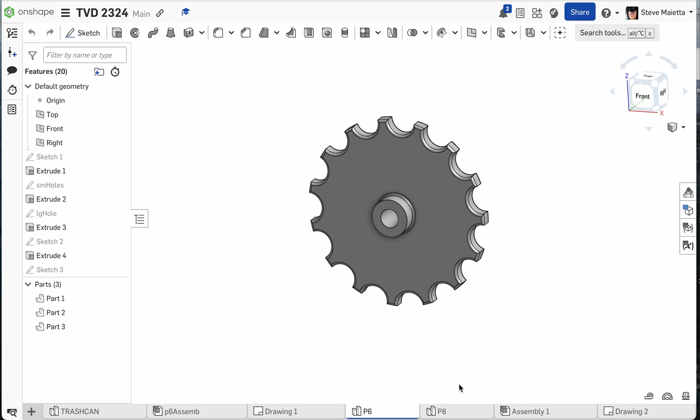Hello, class. Let's build an assembly of parts in Onshape. Go to plus, create assembly. Now we're going to insert our three parts into our empty workspace.

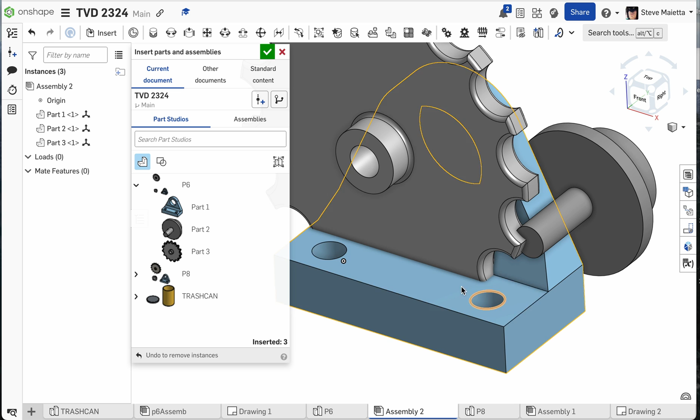Insert, find your parts, click part 1, drop it. Click part 2, drop it. Click part 3, drop it. If you have 4 parts, put your 4th part in. Accept that. Now, you see we have 3 parts. Let's move them around to get a little space. You can click and drag, okay?

Something to note, when you're moving things in an assembly, use the standard views. It makes lining things up easier. Okay, there's our 3 parts. One thing I recommend is line up the base part, the foundation of your project. For us, it's this bracket. I would kind of make sure it's near the origin somewhere. It's not super important, but it can't hurt.

Okay, now let's take our base part number 1, and we're going to 2-finger click here and we're going to fix it. That locks it to the ground so it can't move anymore, and that's important to have a piece that can't move, especially since we want our gear to be able to spin when we animate it.

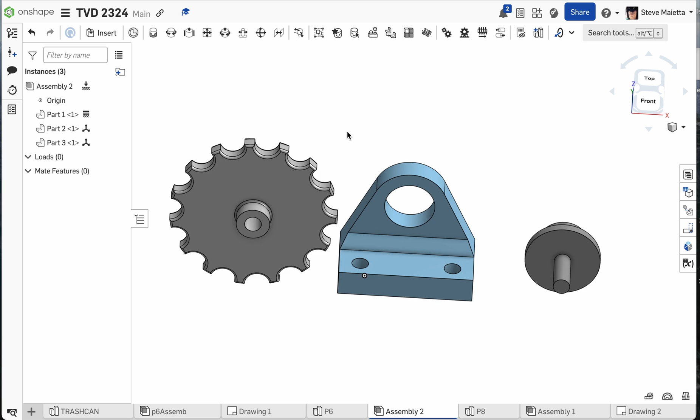Okay, now we're going to put our axle into our base, and looking at our axle, I noticed that it's in the wrong orientation. It should be pointing back this way. So I'm going to go top view and click on it, and now you see you have some arrows to move and some handles here, this one to rotate. So I'm going to click that handle and drag it, and I'm going to go to 180. Make sure you type in 180.

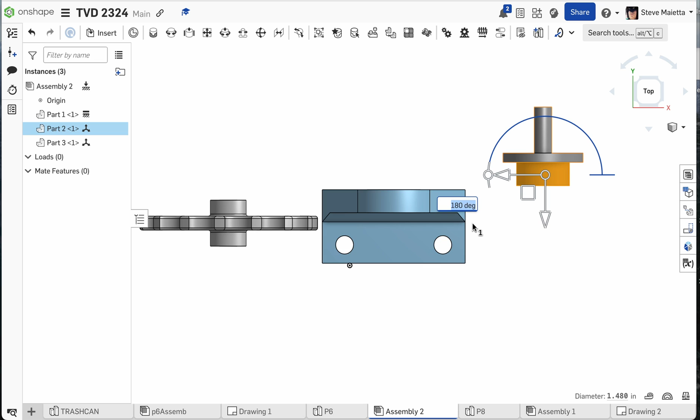Always rotate your parts with 90-degree increments, okay? Or else they get all out of whack and it's hard to assemble things. Okay, 180. Click, and now it's set up right. Great. Now we're going to fasten it to our thing. You cannot just drag it here and call it good, okay? You need to use what are known as mates.

The first mate is here. It's called a fasten mate. We're going to fasten our axle to our base. So I'm going to select what surface I want to match with another surface. For me, that's going to be this back surface of our axle. And notice when you hover, you see these little yellow circles. Those are known as mate connectors. Onshape puts them at all corners and edges and centers of cylinders.

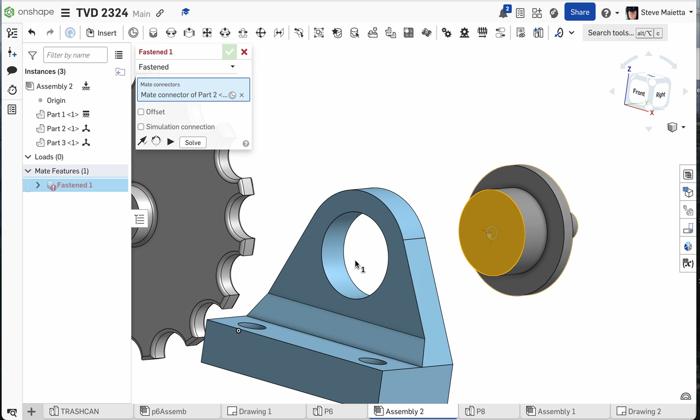So I'm going to select this one there, click it. That puts it in our list. And I'm going to select the one that lives at the surface of this cylinder right here. Click it. And now I'm going to accept that. And now our axle is perfectly fastened into our bracket.

Note, if you need to go back into your mate, you can double click it over here and you can edit. Maybe you need to flip your part around like that. You can flip the axis. You can move mate connectors away from each other using offset. So if I needed to move this part, I could shift it over a bit. Or in this way, I could shift it over a lot or a little. So the offset is very handy.

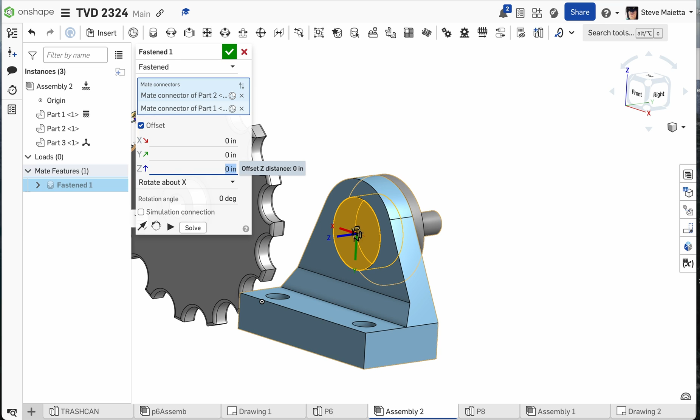And you can also rotate parts. You can rotate those mate connectors as well. We're not going to do any of that, but there's that option. All right, so that's fastened to that. Great. The next part is the sprocket, and we need to make the sprocket live on the axle here, and it needs to be able to spin.

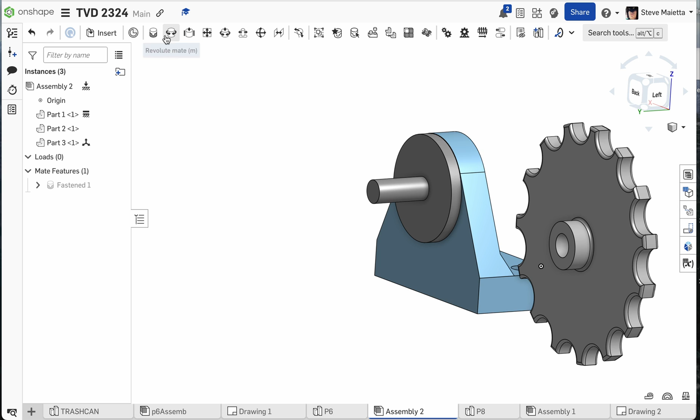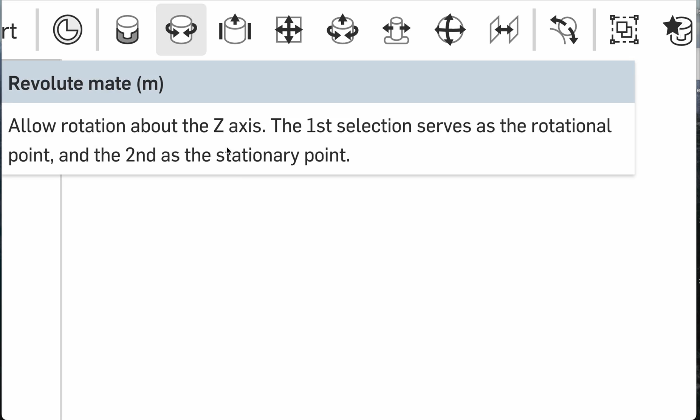So the next mate is called revolute, and if you look at the shape of that, it looks like something that can spin. And what does it say? It says allows rotation about the z-axis. The first selection serves as the rotational point, and the second as the stationary. So we're going to select first our sprocket and secondly our axle. Same way, you need to select 2 mate connectors. I'm going to click the revolute mate.

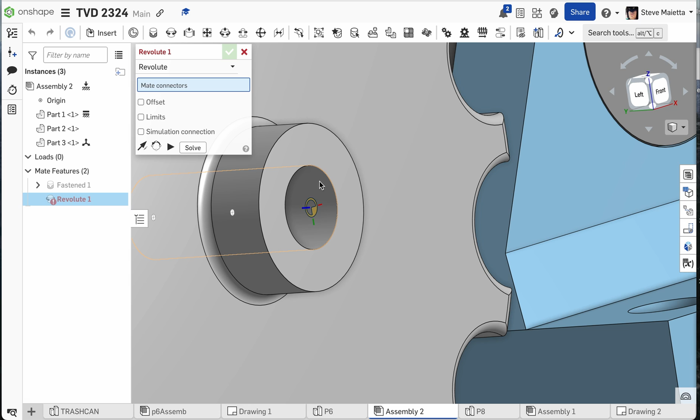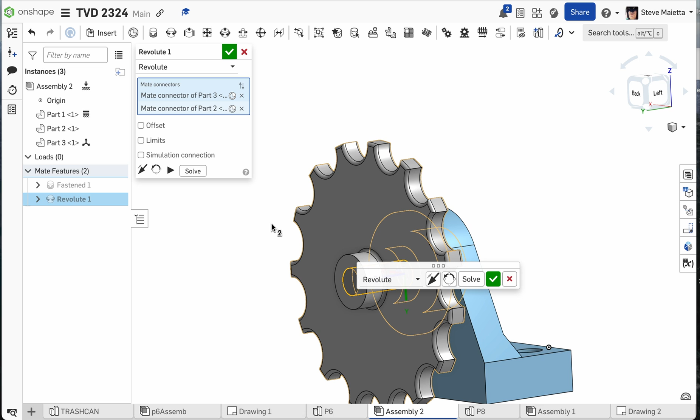I'm going to choose one on my sprocket first because that's the rotational piece. I'm going to come around to the back and select this surface of the inner hole there. Now I'm going to orbit around to this side, and I want that mate connector to match up with the center of this surface here, or the end of this cylinder, and that's right there. So I'm going to click that, and Onshape will pull those pieces together. Now I'm going to accept that.

Now notice I can click and drag my sprocket around. It can spin. Because this is fastened, fixed, this can spin. A cool thing you can do with all these mates that have an axis of motion is you can two-finger click and animate. When you click play, it will spin. If you change it to loop, it'll spin forever.

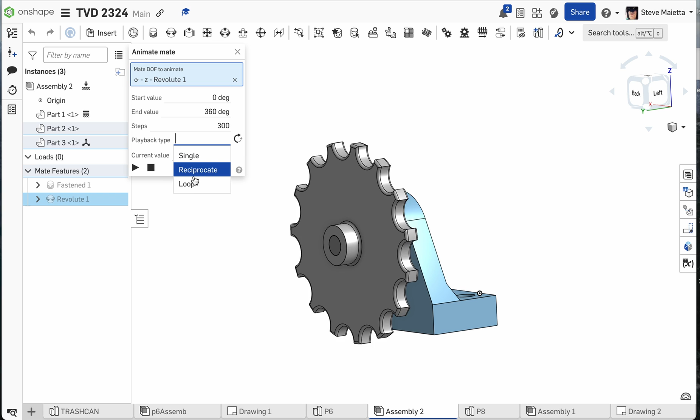All right, so that's our assembly. Great work, pretty simple stuff. Do it this way, and now we can put our assembly as the first page of our plan packet.